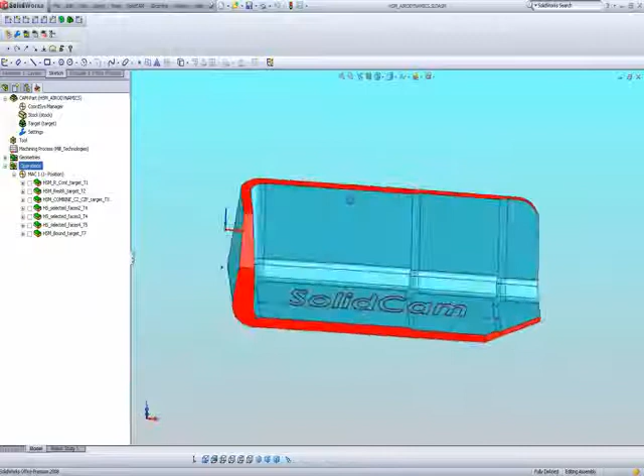And there's really no way to do this properly using only 2.5D options. So in SolidCAM we have a few options that we can deal with this. And in this particular part we'll be using the options of HSM, high-speed machining, to mill out most of the part. And for those undercut areas and specific surfaces, we'll be using the high-speed surface machining.

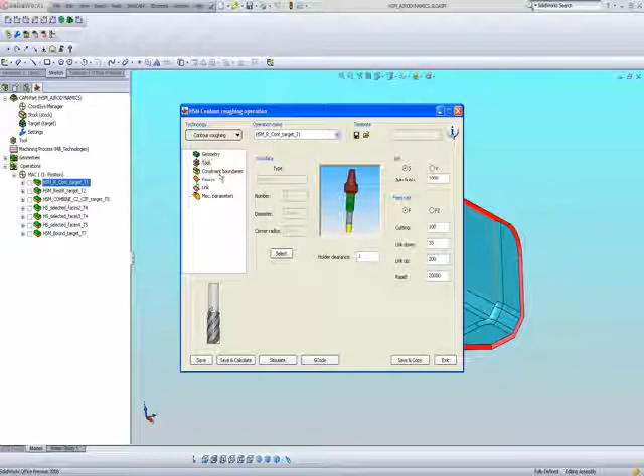We'll start off with our first operation, which will be a rough cut of our part. We'll go into the first operation that I've created. And you'll note, first of all, I'm using the contour roughing, which basically roughs out most of the material. The tool that I'll be using will be a 20mm tool, a relatively large tool to get as much material out as possible. The constraints will be automatic according to the stock material that we have.

And the passes, I'll be going down every 3mm, and I'll be leaving 0.5 millimeter of material for finishing. Remember, you can see all of these options. Every single field that I click, you can see what's going on in the picture on the left hand side. Tolerances, step down. In my links, I'll be working on climb cutting. And let me just go back to my passes area.

One other thing I did not note was the fact that I'll be working with detect core areas. In other words, if I can work from the outside into the part, in this particular case I can work in that sort of a fashion rather than working from a pocket out. My links, since I'll be working most of the time from the outside in, my ramping, I would do a plunging ramping.

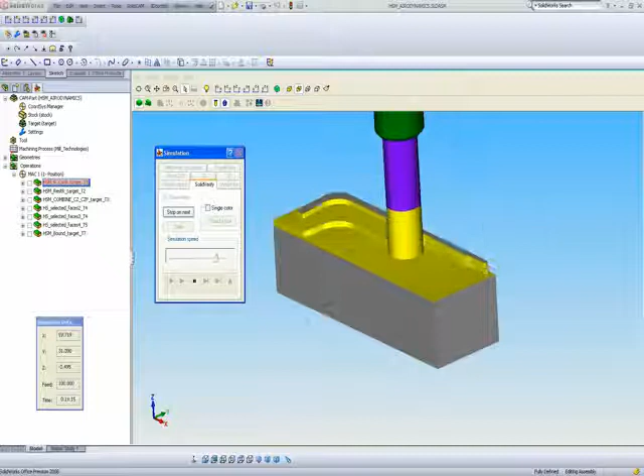Now if I go into my simulation, you'll note, and I'll run the simulation a little slow, the tool is working from the outside, clearing away most of the material from all sides of the part, wherever there's material that can be taken off.

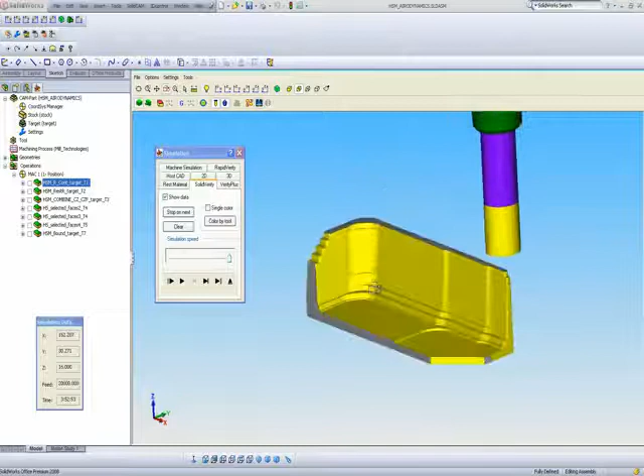Now you'll note also that in some cases the material that was left, since we went down every 3mm, is a little bit too big. These steps over here are a little bit too big for finish cuts. So we'll do another operation, what we call rest rough. On this second operation, I'll be using, like I said, the rest rough option.

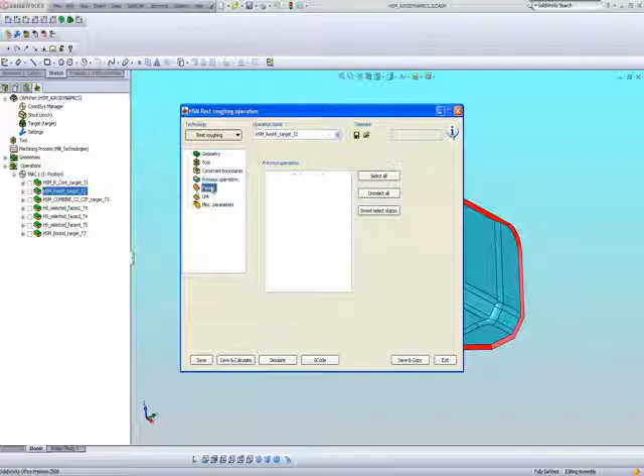The tool, I'll be using a smaller tool, and obviously I'll be going according to the previous operation. In other words, work the rest rough only according to the previous operation marked off over here. My passes, I will still be leaving 0.5 millimeters, but my step down will be a lot smaller.

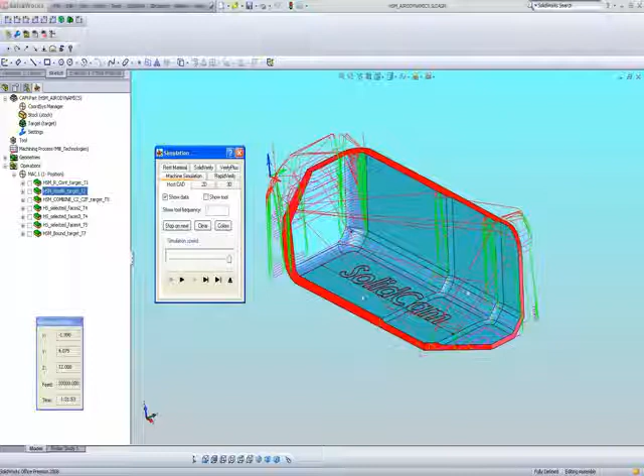But you note when it does work, and I run this simulation over here, it'll only work in those areas where it has to take off the material. Notice on this wall area, in this whole open area, it did not work. Only in the areas where there's material to be taken off. And you'll also note that when it goes from one area to the next, it's using the shortest route.

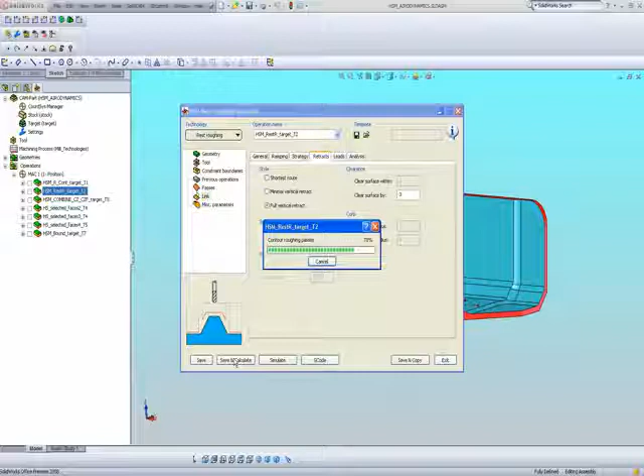This can be pointed out if I bring your attention to the links as far as my retracts. We have the shortest route. If I were to do full vertical retract, and now do save and calculate, you'll note that the tool will go up to the very top every single time that it has to go up instead of jumping over the shortest possible route.

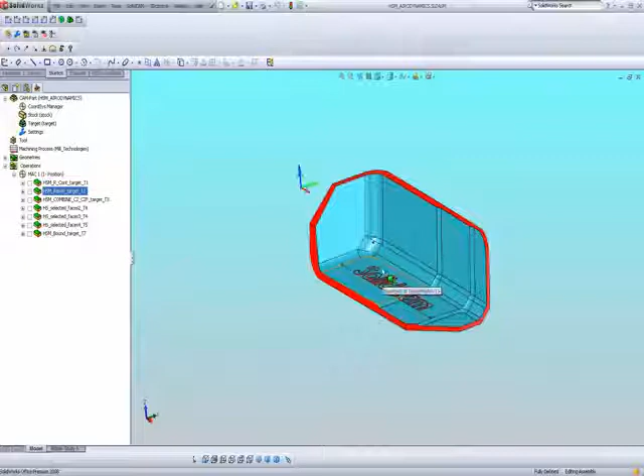Next operation, I'd like to start with a finish cut already. And what I'd like to do with this finish cut is basically work on this entire surface and this whole inside area. But we have two different options to work. First of all, we can work on these walls, these areas over here, using what we call constant Z. We're going down constantly until we get to the bottom.

But for the flat floors, as we see over here, we have something called horizontal. So instead of doing two separate operations of one horizontal and one constant Z, we have the option of using what we call a combined operation. Let me just go into my operation itself, and I'll be using a combined Z. I've used combined Z with horizontal machining.

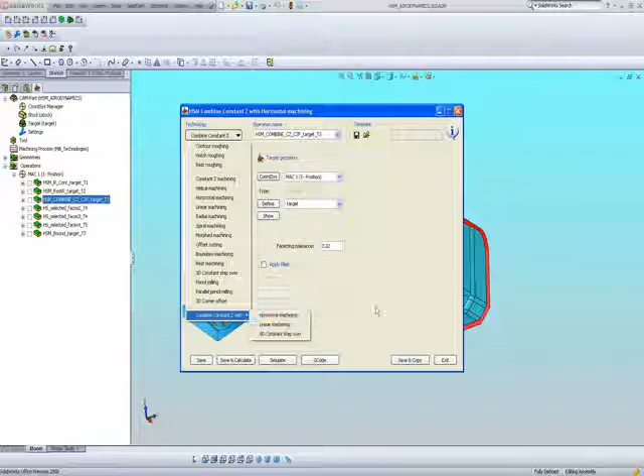Now, my tool that I'll be using will be a 12 millimeter with a 3 millimeter radius at the bottom of the tool. My constraint boundaries, however, this time I'll be using a little bit differently. I won't create them automatically, since I specifically want to work only on these surfaces over here. I've used the option of selected faces.

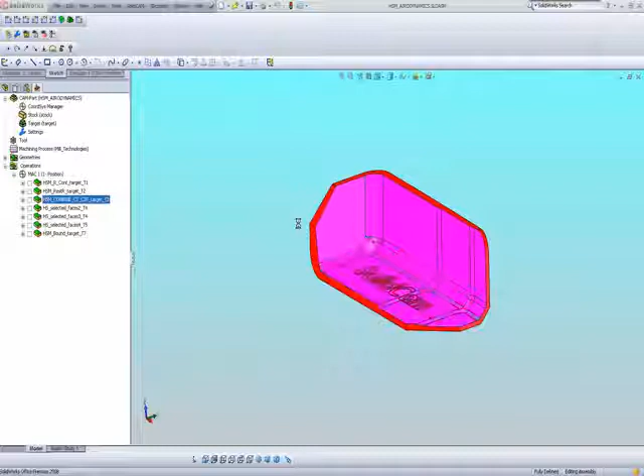If I go into my selected faces, first of all, you can see the boundary that's created. But if I go into my define area, and I show over here the faces I've selected, you'll see that I've basically selected these faces. These are the faces that I want the program to work on. Now,

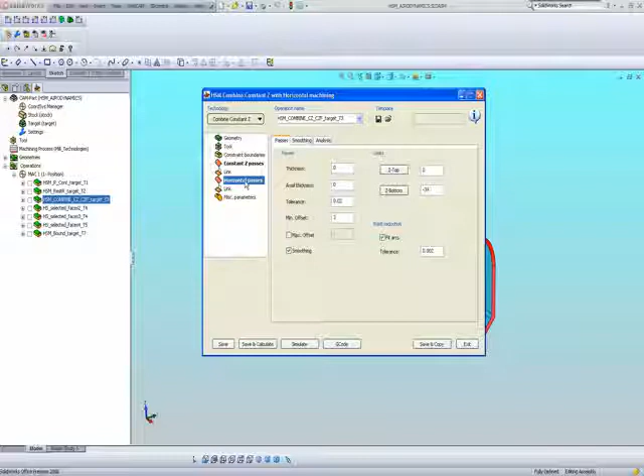if I go into my constant Z, you'll see I have my step down as far as when I'm going down every single time. I have a separate for constant Z, my links. I'll be working bidirectional, going back and forth. And then I also have the option of horizontal passes. And my horizontal passes basically work on the floors of the part. My link, my ramping in, I'll be going in and plunging.

And one other thing that's important to notice is that in my link over here, we have something called machining order. In other words, if I want, I can either do the constant Z first, or I can do the horizontal first. In this particular case, I was better off doing the constant Z first.

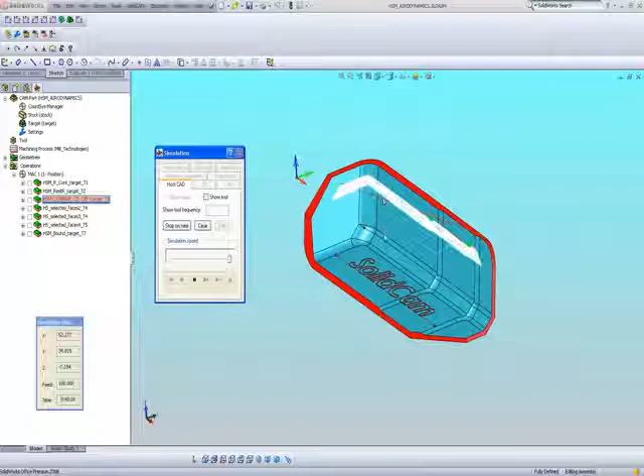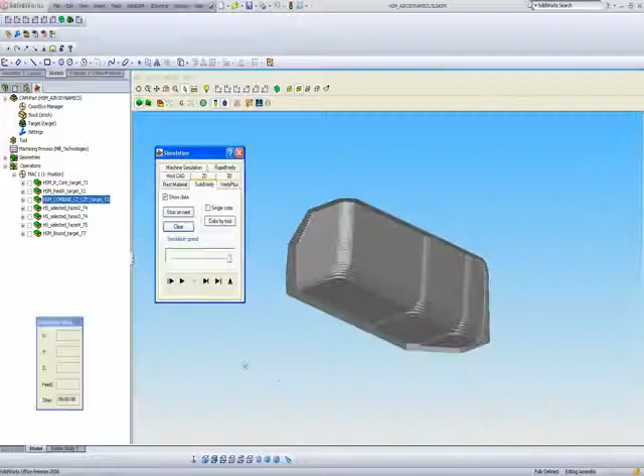And if I go into my simulation, you'll see that the simulation now is working on the walls. And then when it gets to the bottom, it'll work on the floors itself with wide steps, since we have a flat bottom on our tool itself also. If I were to use my solid verify simulation, you'll note, like I said, the tool is cleaning the outside as it's going down.

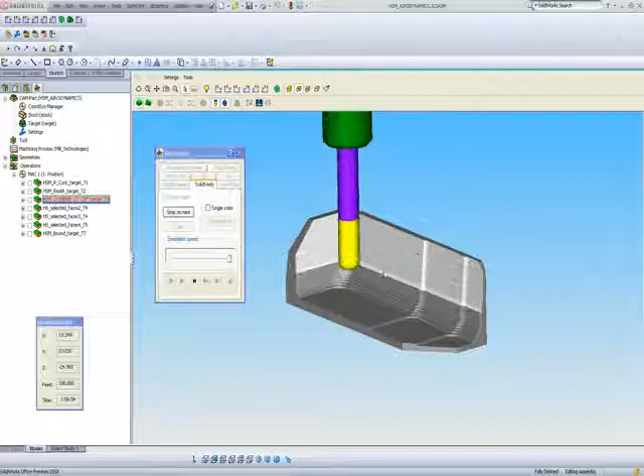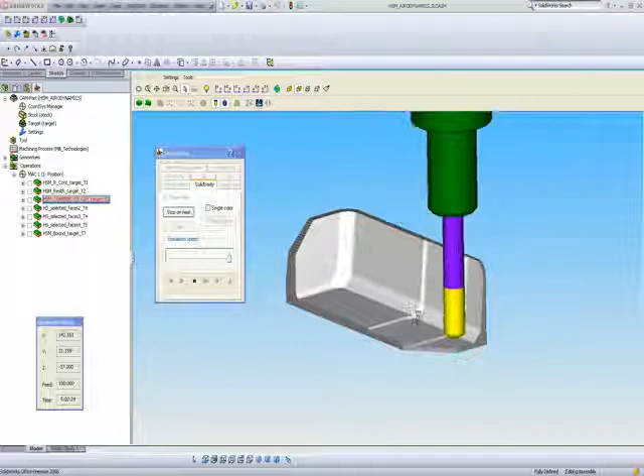And we'll let it run. And as we get down to the bottom, you'll see that it'll start working on the floor itself. You see each floor now is cleaned. And we've basically finished the inside of this part.

Now, what you'll notice here also, however, is that we still have this surface here to do, and we also have this area over here to do. Now I can fool around and do some linear operations on these walls, but I'm going to use right now what we call high-speed surface machining to clean these areas. The calculation is very quick, and choosing it is also a breeze.

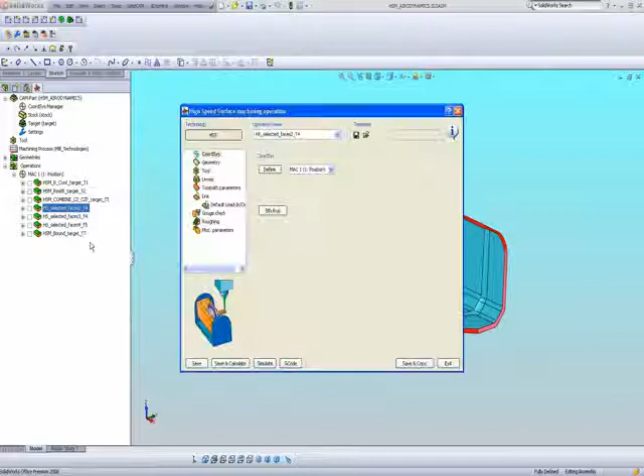If I were to go into my operation, I have my coordinate system, my geometry, and I've chosen the option of morph between two curves. In other words, what I'm doing over here is I'll be working on this surface, morphing between this curve and this curve. I have my selected face as shown here. I have my start edge curve as shown here. And of course I have my end edge curve as shown here.

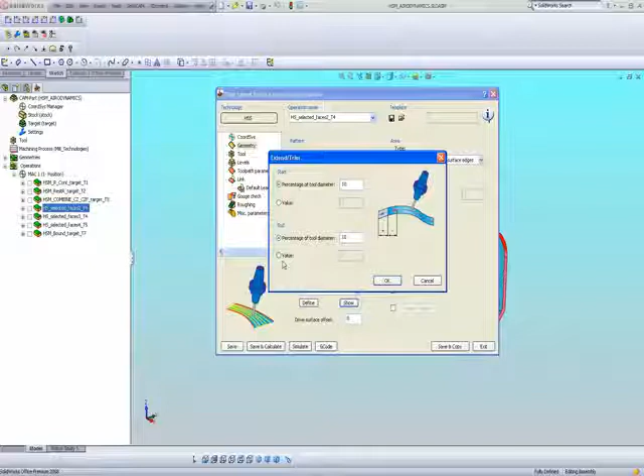If I want, I can even extend the ends so that it goes past the part itself. Extend trim. As you see over here, I can extend it a little past the edge, so that way it doesn't stop exactly on the spot itself over there. The tool I'll be using is a 6mm ball end mill.

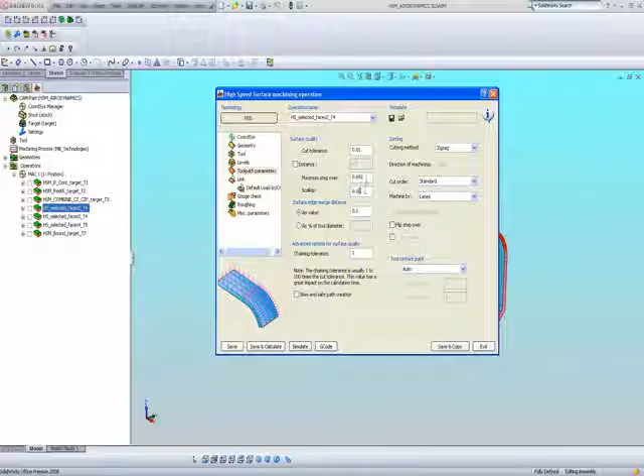And my toolpath parameters, you'll note I can use here an option of scallop. If I change my scallop, let's say to 0.2, you notice that my maximum step over is automatically changed also. Change that, fine. If I change my maximum step over, you'll note that my scallop is also changed automatically. Go back here. Everything changes. These two options are connected one to another.

Another thing, I'll be working with cutting method zigzag, back and forth. And in my links area, I'll be using a lead in and a lead out. And if there are any gaps, I will connect them. But let's take a look now at my simulation. And you'll note the tool is simply going down on the surface back and forth and leaving it.

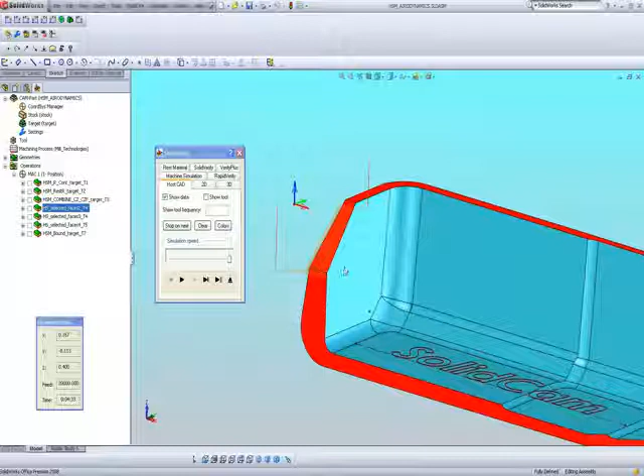Very simple operation. Also, I'll just go back and do the calculation, even though I've calculated it already before, just to show you how quick the calculation actually is. That was it. Now, I've done the same thing in my next operation for this surface here also. Let's do a simulation of both of these operations. And I'll use my SolidVerify simulation.

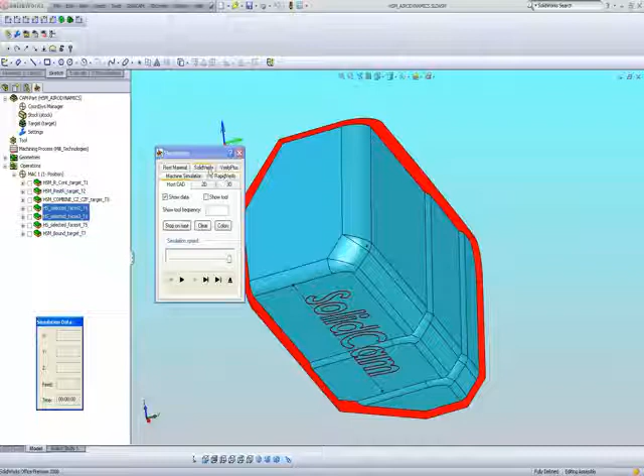You'll see that it basically works on this wall over here and then cleans this surface over here. Done very quickly and very simply.

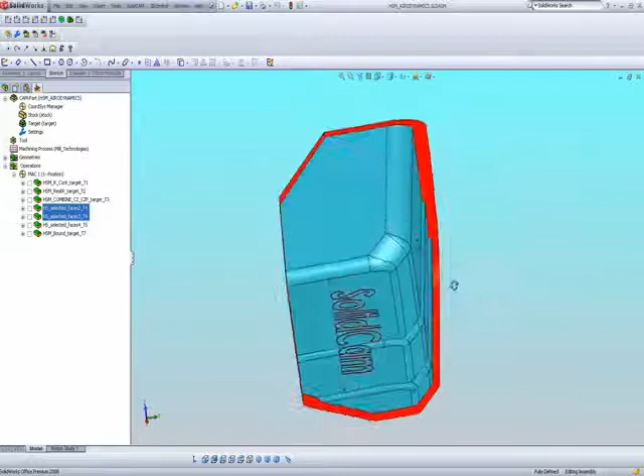Now I'd like to deal with these surfaces in the back over here, including this wall over here, this undercut over here. Remember, all these walls over here are actually an undercut. In other words, they're in a negative direction if I look from the top down, as you can see.

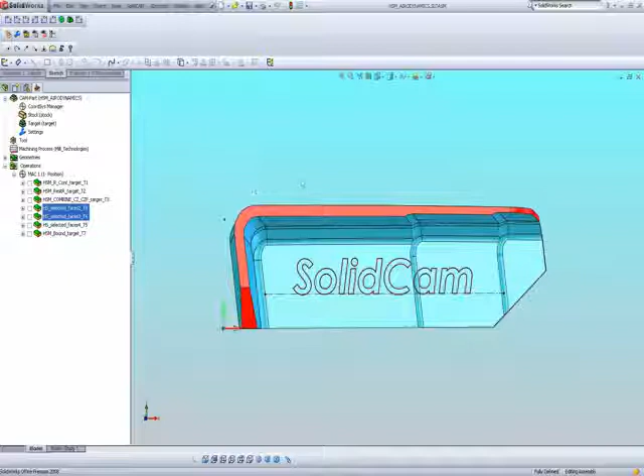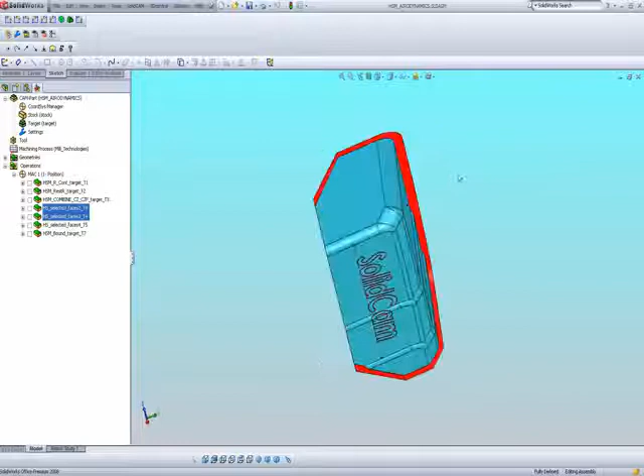So in other words, the only way I can really do it now is we have the option also again of high-speed surface machining, because high-speed surface machining allows us to work on undercut areas and also gives us a tool called gouge control, which if I see the arbor or any part of the tool hitting an area where I don't want it to touch, it won't ruin those areas either. It'll act where I can pull it away from that area or just stop the calculation and finish my operation at that point. Let's take a look at what I've done.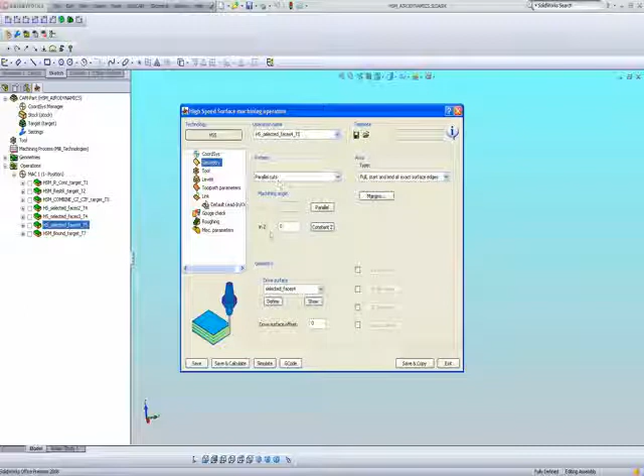I'll open up this operation, and I've simply chose my geometry with using parallel cuts in the Z direction. And if we look at the faces that I've selected to do, you'll see I've even selected these sides over here also to have one smooth cut all around.

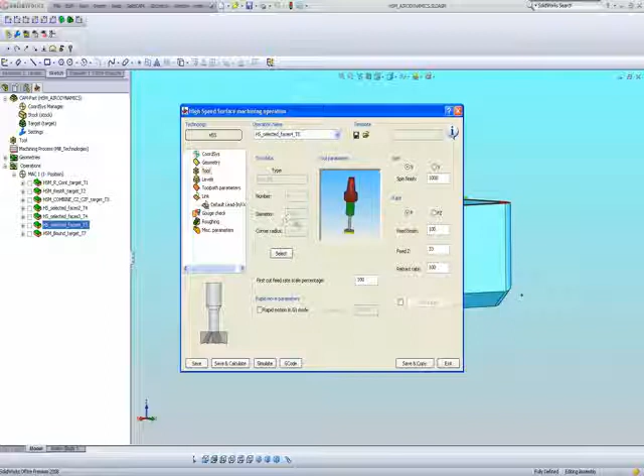Now the tool that I will be using in this particular case will be a slot mill, a T-cutter, or Woodruff cutter, whichever name you prefer. And I'll be using it with a diameter of 36 millimeters with a 1 millimeter radius. And we'll also note that the arbor itself is a 10 millimeter arbor.

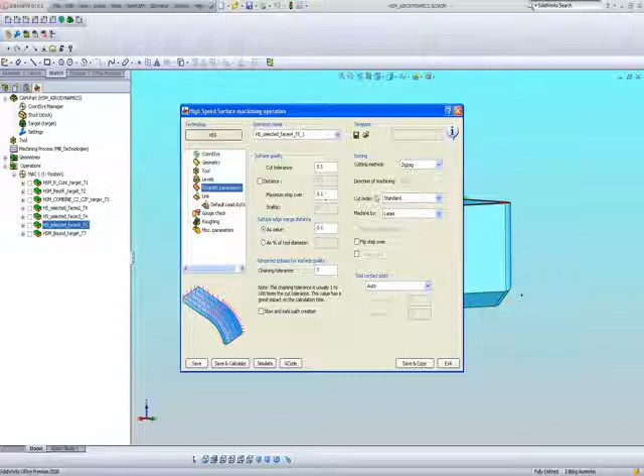Now, my toolpath parameters, I'll be going down every 0.1 millimeters, and I'll be working zigzag. Now, of course, I have my links. I'll be going in and out using a radius. But we have here something else which I've mentioned before.

We call gouge check. Now, in my gouge check, I've enabled my gouge check, and I've said, okay, if I see that my holder or my arbor hits any of the drive surfaces, in this particular case, these are the drive surfaces I'm worried about, I can tell it move tool away, or even stop tool calculation.

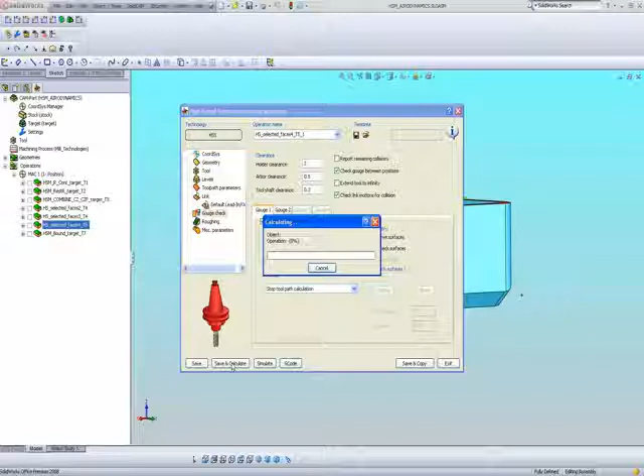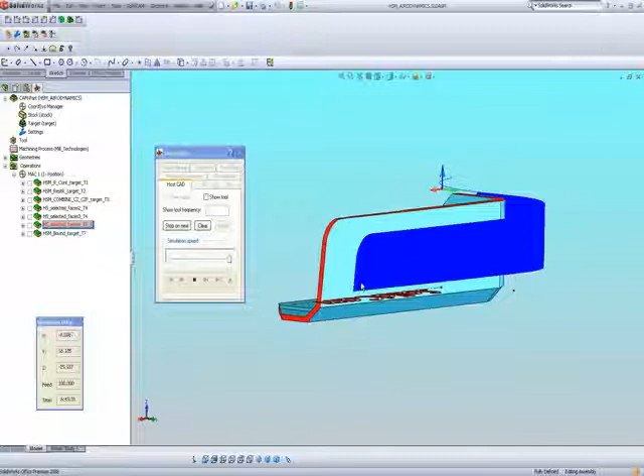If I do save and calculate, which is also relatively quick, and then do my simulation when this finishes, first of all, let's take a quick look at our toolpath. And you'll see that the toolpath goes down on the side over here, coming in from the outside over here. Remember, I've gone down every 1/10 of a millimeter to give it a nice full surface.

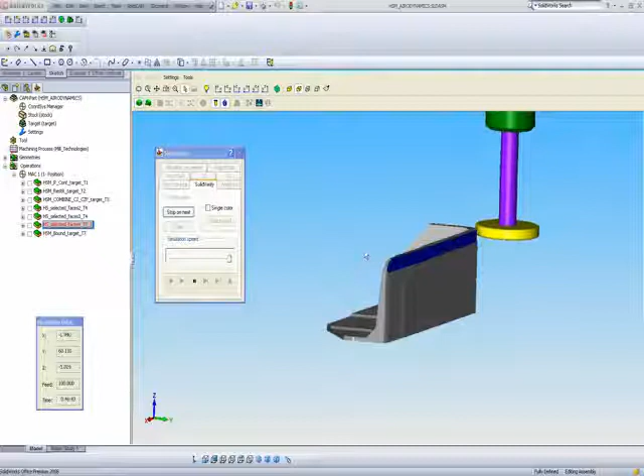Now note what happens when it gets to the bottom. It'll curve its way underneath and then retract to the outside. If I were to use Solid Verify instead, you'll see that the tool is working its way around the back. And if I were to use the top view and get rid of my holder, you can see exactly what's going on.

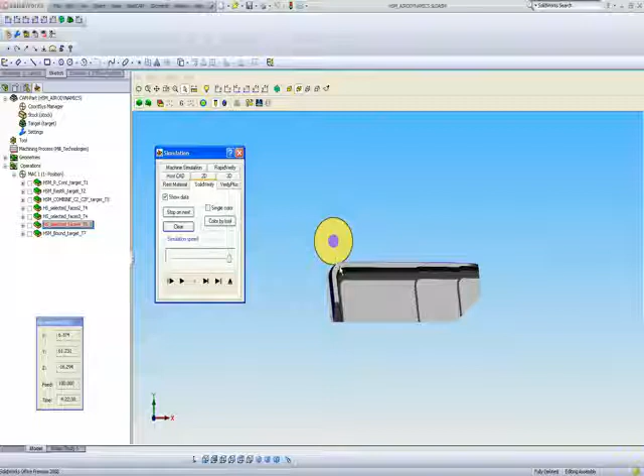Let me just stop it here for a moment and just do one step at a time. You'll see now that the tool, when it gets to this area here, I'll try and stop it again. You can see already over here that the tool is actually underneath the top of the surface. It's already past that area. Let me just continue now with the rest of my simulation. Now bring the tool holder back.

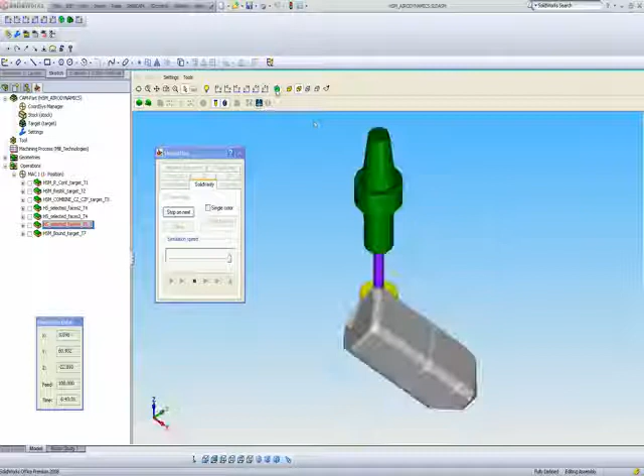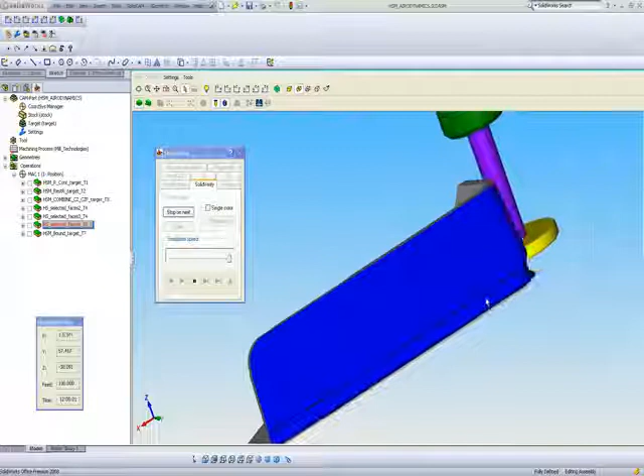And you'll see that's all being cut exactly the way it should be. As it gets down to the very bottom, you'll see it'll start curving its way in. And basically now we've cleared off all that material that still has to be cleared off.

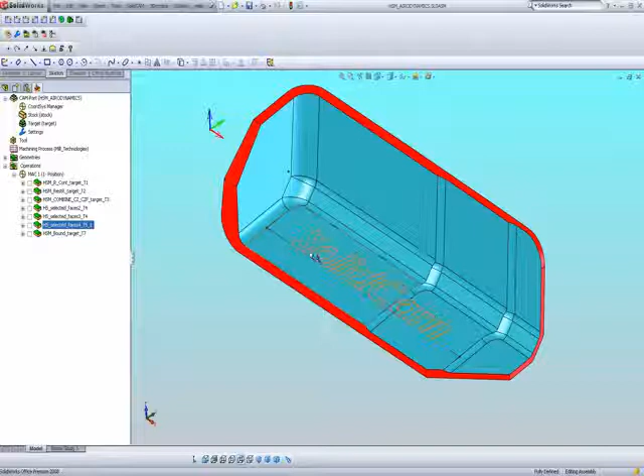Now, the last thing I like to do just to finish off this part is, you see this text over here? I'd like to actually engrave this text onto the part itself. So the way I've done it is, again, I've used this time the HSM option, and the option that I've used over there was boundary machining.

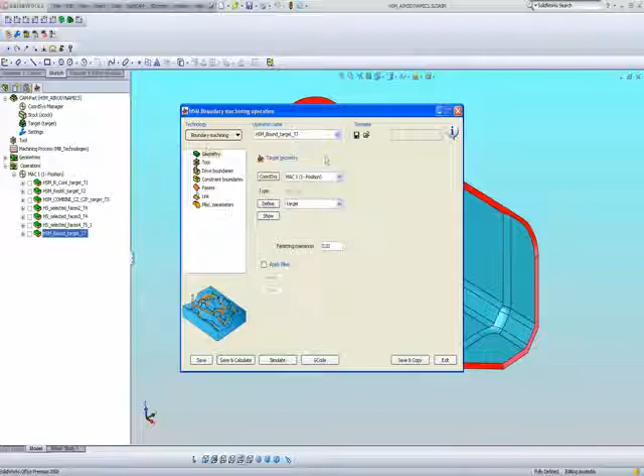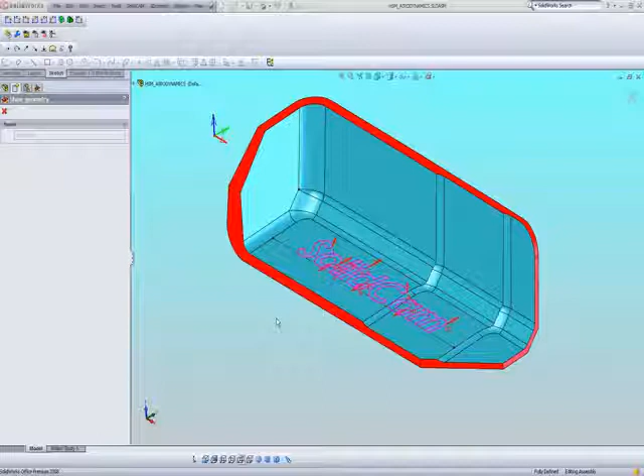Basically what that does is I pick a boundary that I wanted to work on, such as the text that I've seen here, and I'll show that to you in a moment, and I wanted to go with a tool that has a point at the bottom, and I want to basically go on the drive boundaries, which is my text, and I want to continue. I want to work obviously in the middle.

My constraint boundaries is obviously my part itself, and all I've done is in my passes I've told it axial thickness of minus 0.2. I left my regular thickness as 0, but axial thickness of minus 0.2. By doing this, I've actually forced the tool to go further into the part itself.

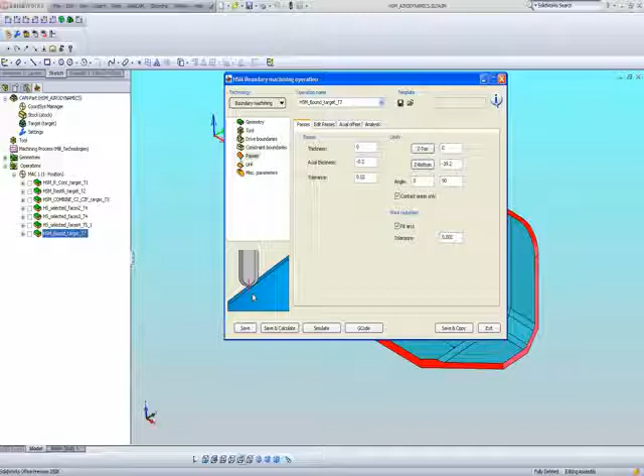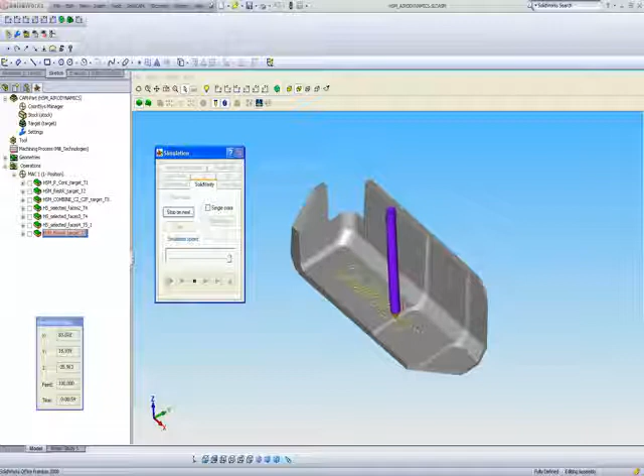Let's just take a quick look at my simulation, and you'll note that my toolpath goes on the text itself. And if I were to use my Solid Verify option of simulation, you can see in my simulation that the text is being machined out exactly the way it's supposed to be done, all the way to the bottom. Basically now we've completely finished machining out this entire part using HSM and the HSS options.